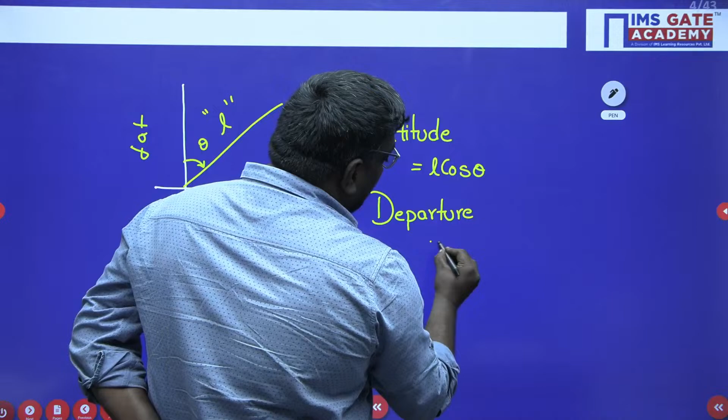Now, as part of this, whatever the northings and southings will be considered as latitudes. Again and again I am telling you the important point: the northings and southings will be considered as latitude. And in traditional methods, we take northings as positive and southings as negative.

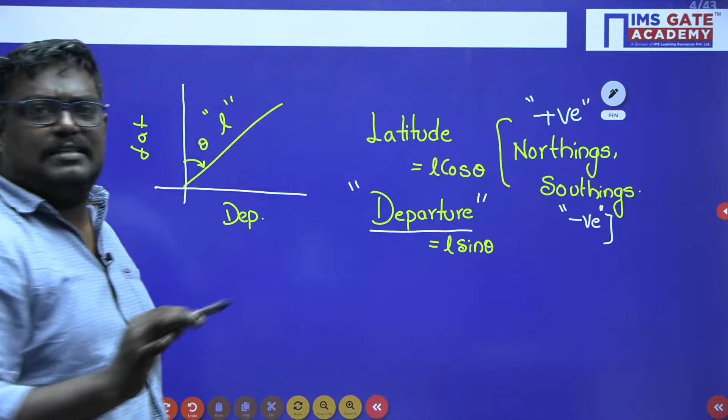Agree? And when I talk about departure, let me tell you one important thing: in departure, we take eastings as positive and westings as negative. So here we have two things: one is easting and westing, and here we have northings and southings.

So here if we consider this as a line L, we call this as... L cos theta? No, we call it L sin theta, because people are habituated to thinking horizontal line means L sin theta. Very good afternoon, Amit Goyal. Here we call it L sin theta and here we call it L cos theta, because actually this line will be taken as 90 minus theta.

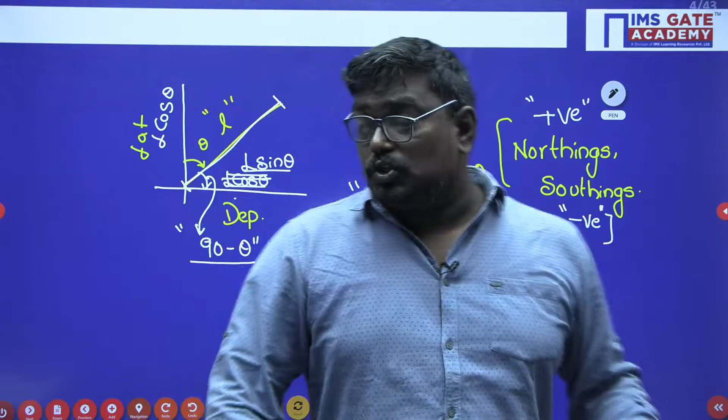So here, my dear students, when I consider latitude as L cos theta and departure as L sin theta, northing as positive, southing as negative, similarly easting as positive and westing as negative, with this actual concept we can solve this problem.

So my dear students, what do you mean by a traverse? A traverse is nothing but a group of lines connected together to form a closed loop, where using the help of a traverse you can find the area of a plot. Suppose you own a plot in Delhi, to find the area of your plot you can use the help of compass and chain surveying to know the area, which is one of the objectives of surveying.

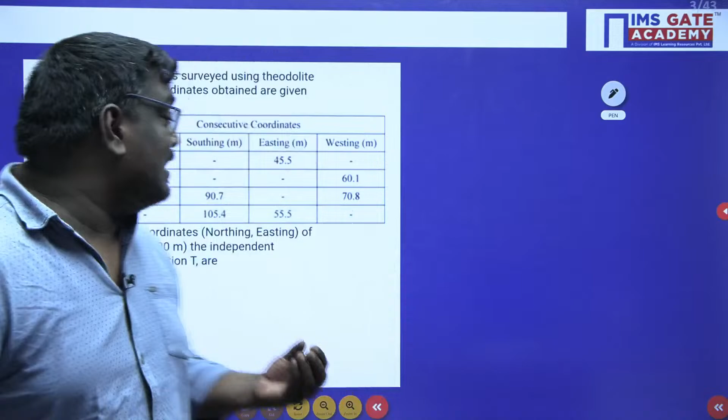So let us solve this problem, my dear students. So when I consider here, what is the summation of northings?

Here the summation of northings will be taken as 190.8. If I take the summation of south, it will be taken as 196.1.

Now consider latitude. Latitude is defined as sum of northings minus sum of southing. Sum of northing is 190.8 minus sum of southing 196.1, which gives around negative 5.3 meter.

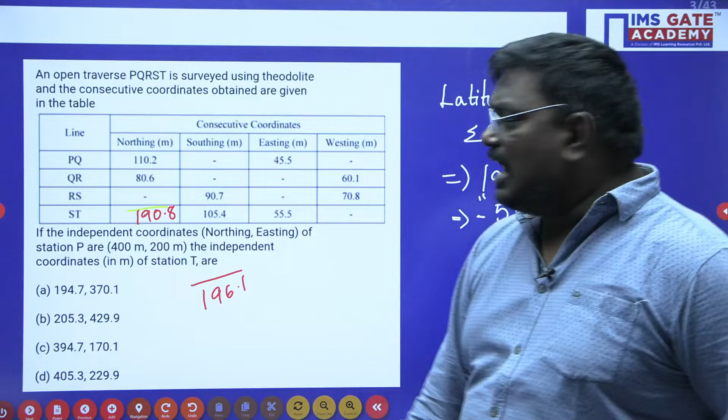Similarly, what is the sum of the eastings? Sum of the eastings is 101 and sum of westings is 130.9 meter. Now when I talk about departure...

Departure is nothing but the sum of the eastings minus sum of westing. Sum of easting is 101, sum of westing is 130.9. So we have minus 29.9 meter as departure, and sum of northings minus sum of southing is minus 5.3 meter.

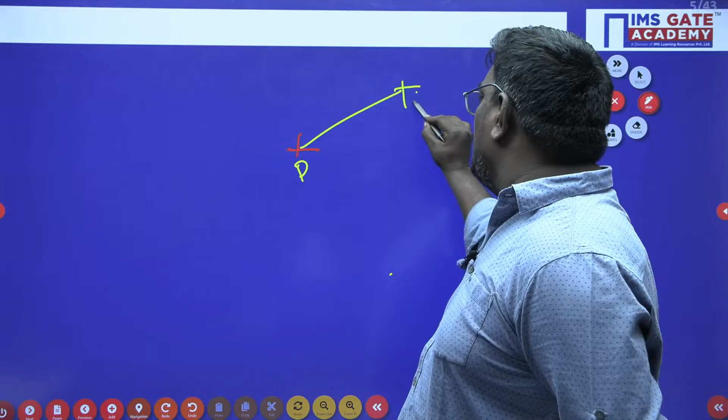Now he is asking what is the independent coordinates of T. Let me explain with a traverse. We have a point P, a traverse Q, and we have R, S, and T here. So he is asking what are the coordinates of T.

When finding the coordinates of T, we have the northing given as 400 meters for coordinates P. So 400 minus 5.3 gives 394.7 meter, which is the independent coordinate of T for northing. Similarly for easting, it is 200 minus 29.9 meter, which is equal to 170.1 meter. So these are the coordinates of point T.

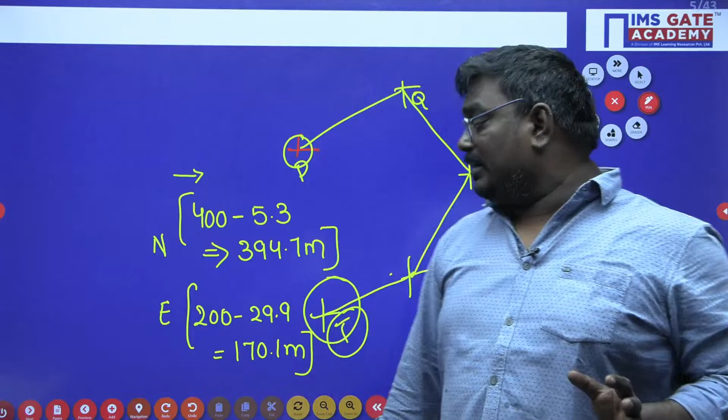These are the coordinates of coordinate T, and the word independent has a significant effect here. So the option is 394.4, 394.7, and 170.1. So option C is correct.

Let us understand the key points of this problem. A traverse is nothing but a group of traverse lines connected together. Latitudes are the northings and southings, departure is the eastings and westings. Northing is taken as positive, southing as negative, easting as positive in departure, and westing as negative.

We calculated the sum of the northings and sum of the southings, and got a value. Similarly we did for easting and westing, and the final answer is 394.7 and 170.1.

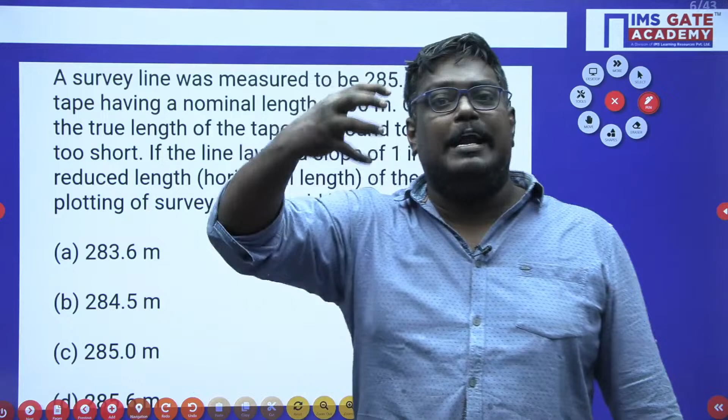So you may think this is a challenging question. A challenging question cannot be one that is not part of the GATE exam. It is a question where we identify the importance of the question and the possibility of it appearing in the GATE exam. I hope you enjoyed that question.

Let us move to the next question. A survey line was measured to be 285.5 meters with a tape having a nominal length of 30 meters. On checking, the true length of the tape was found to be 0.05 meters short, and the slope is 1 in 10. Find the reduced length of the plot of the survey work.

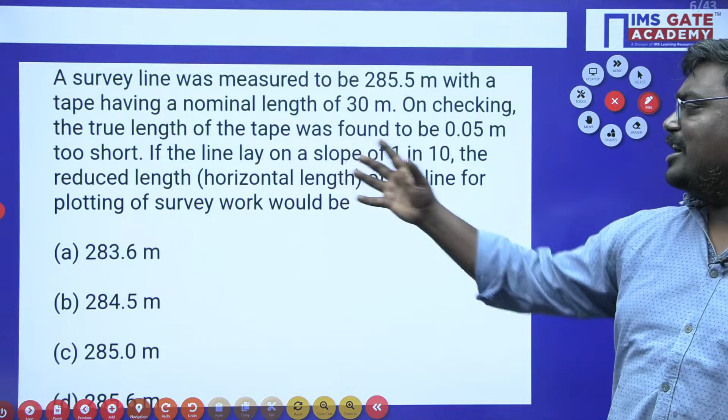How has the surveying been started? To measure a distance between two lines, we use either a chain or a tape. To measure horizontal distance, we use a chain or a tape, and to measure bearings, we use a compass. Let us understand this question.

There was a chain of length 30 meters, which is very important. This 30-meter chain has been reduced to 29.95 meter, because the chain is short by 0.05 meter. Remember, the chain is short by 0.05 meter, so you are aware that the chain is short.

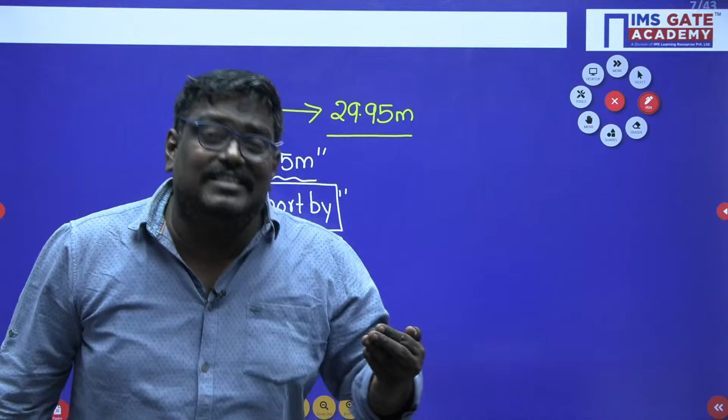When measuring a distance between A and B, if the chain is short, the measured distance will be more. So error will be positive and correction will be negative. So here, what is the actual length between the two stations A and B given in the problem?

285.5 into actual length of the chain is 29.95 upon 30. Sir, this is nothing but the correction for standardization. So on solving this, you will get a value of 285.024 meter. Agree, my dear students? Very good. Students, please try to respond in the chat box.

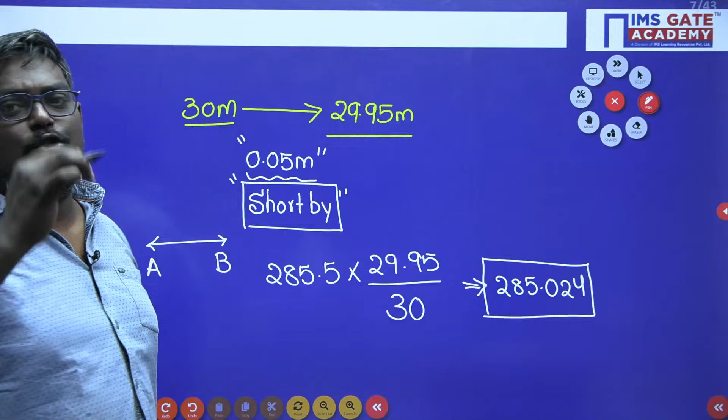So here, there are 2 points A and B. The actual length of the chain is 30 meter, but now it is short by 0.05 meter. So I applied the correction for standardization and I have got a value of 285.024.

But let me tell you one important thing. This length is laid on a slope. If this length is laid on a slope of L and if it is making an angle theta, so what is this length, my dear students? This length is nothing but L cos theta.

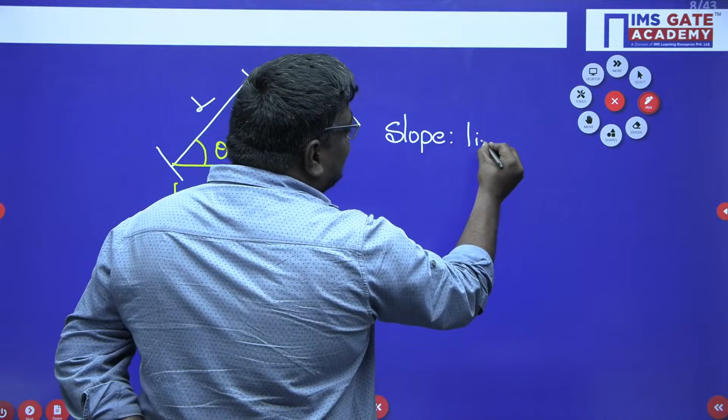So here, the slope given in the problem is 1 in 10. When I discuss slope, it means M, and M is nothing but tan theta. So when they give you tan theta as 1 in 10, what will be cos theta? Cos theta will be equal to 10 upon root over 10 square plus 1 square, that will be equal to 0.995. Agree, my dear students?

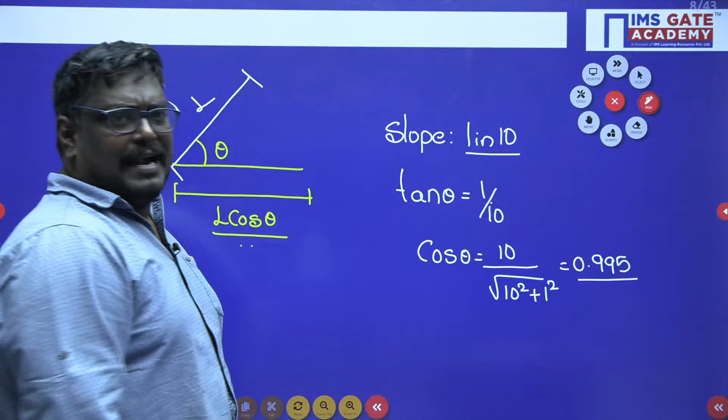Very good. So how do you find out the horizontal length? Now the length is 285.024 meter - it's one of the gate question also, students. Now corrected length will be equal to 285.024 meter multiplied by 0.995, which will give you the value 283.6 meter. So my dear students, the funda here is simple.

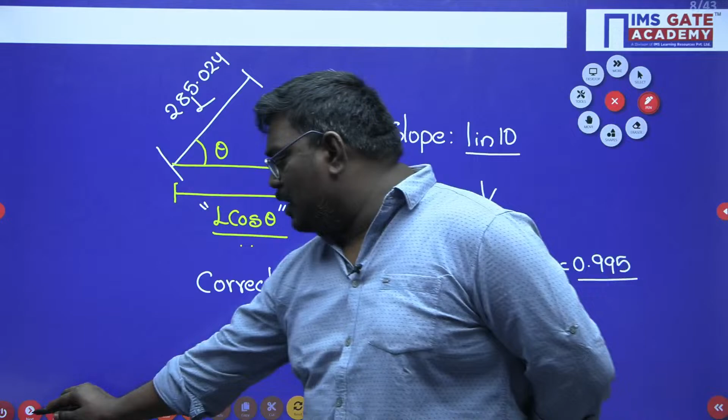How do you find out the distance? The distance is found using a chain or a tape. Correction for standardization - let me tell you, the key points in this problem are correction for standardization is given by the formula: length of the actual chain, that is, because it is short by 0.05 meters, so L actual length of the chain and correction for each chain length. So if you apply this, you will get the correction for standardization.

And also they are doing the correction for slope. Correction for slope is always negative, my dear students. It can be taken as L into 1 minus cos theta. So these two concepts will help you how to solve the problem.

Now see, students, we have another beautiful question. A square area with a side of 100 meter appears as 1 centimeter square. The photograph map shows that a contour of 650 meter passes through the area. If the focal length is 150 mm, what is the height from the aerial photograph?

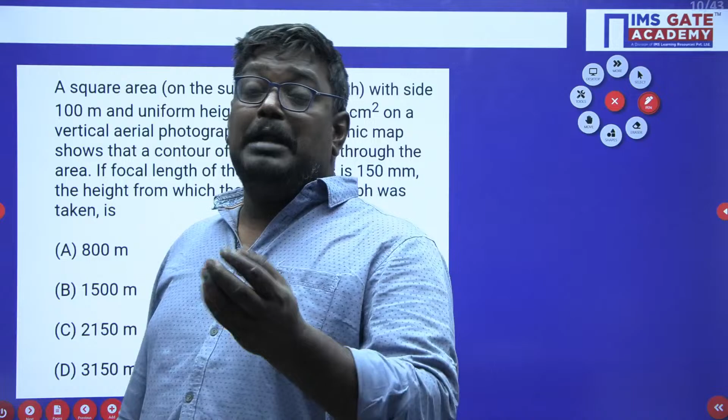Now, my dear students, let us understand what you mean by photogrammetry. Photogrammetry is the art and science of obtaining reliable information about the physical object by the process of recording - meaning you have taken a camera, you have taken my capture, you have taken my photo, so by using this photo, you will know what is my height, what is my width, these things. So that is what you do in photogrammetry.

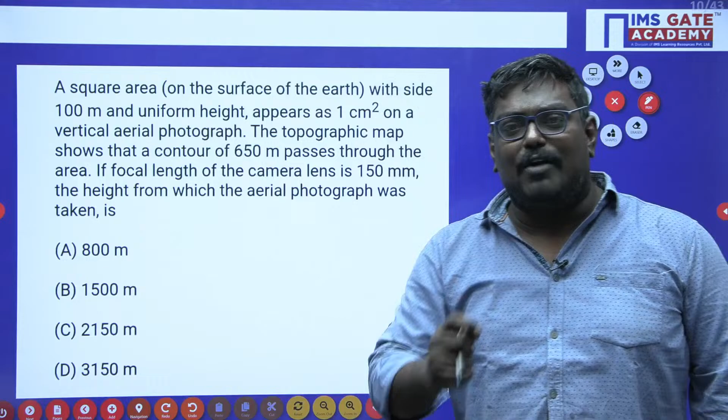Suppose, my dear students, where landslides or disasters are happening, there are some drones - that is nothing but photogrammetry. Again, for your information, photogrammetry is the art and science of obtaining reliable information about physical objects by the process of recording, measuring and interpreting the photos.

So how do you solve this? What is the agenda of a contour? A contour is nothing but an imaginary line joining points of equal elevation. So let us start this problem, students.

Now what do you mean by scale? First let me tell you the basic formula. Scale is nothing but photo distance by ground distance. It is nothing but scale of a photo is photo distance upon ground distance. So see, students, it is simple - in a ground, if you measure distance between 2 points in a ground, it can be 200 kilometers. In photo, you will show it as 2 centimeters.

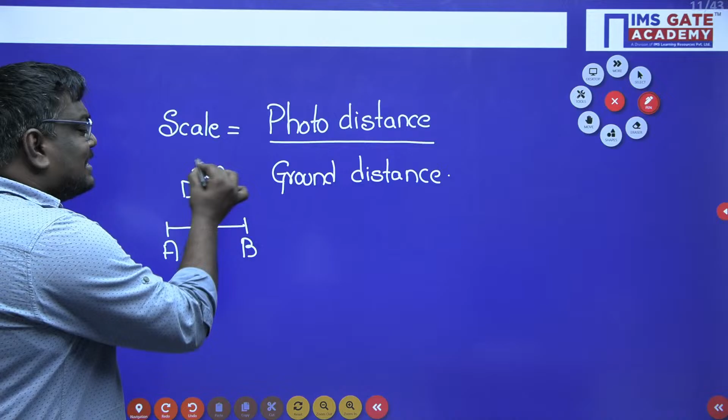So this is how you will do in scaling. If you do in a map, this is what scale of a map means - map distance by ground distance. So we have different cases here. Case 1: focal length upon flying height, if the ground surface is planar, if you are standing on top of a building and doing the value, it is focal length upon H minus h. Or if you are doing for an undulated ground, it is f upon H minus h average. So my dear students, we have 3 different things here.

Agree or not? So please write down these, students. Please write down that, students.

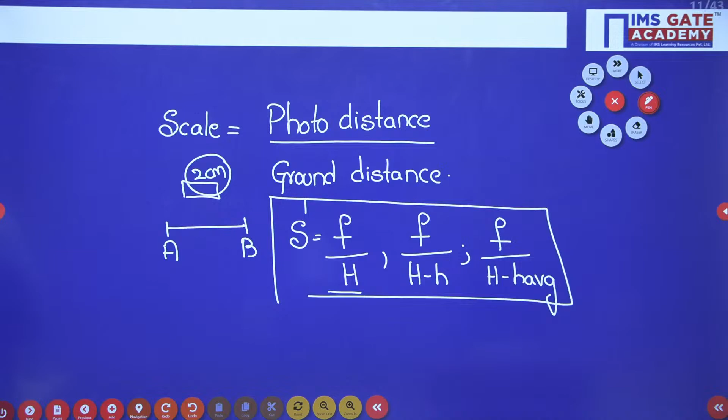Very good, very good. So here, students, you have to know what is a scale. 1 centimeter appears as 100 meter. Sir, see, 1 centimeter appears as 100 meter.

Now, 1 centimeter square appears as how many meter square? So it will be 100 into 100, which will be equal to 10 power 4 meter square.

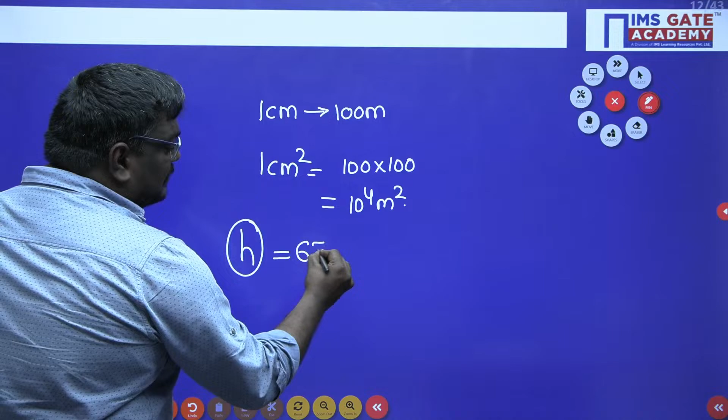Now, students, he has told in the problem that the contour is passing through a height. So the height of an object or building, small h, is nothing but 650 meter. Now what is the focal length given in the problem? Focal length was given as 150 mm, which you can convert into 0.15 meter.

Now, students, here we have the formula: scale is equal to f upon H minus h. Using this formula, you can solve this problem.

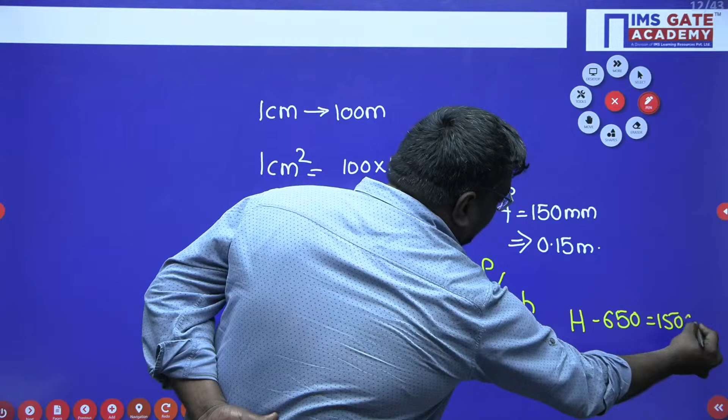So what is scale, sir? Scale is nothing but 1 upon 10 power 4, is equal to 0.15 focal length upon, the flying height we have to find out, minus small h, 650. So you can write H minus 650 is equal to 1500 meter, and H, the flying height, is nothing but 2150 meter.

So students, you should be aware of the concept: what is scale of a photo? It is defined as the ratio of photo distance upon ground distance. Are you able to understand, students?

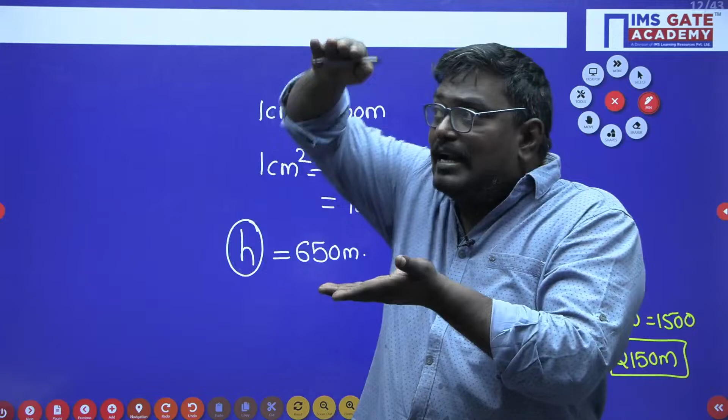So here what I have done is, we have 3 cases. If it is on the ground, it is nothing but focal length by flying height, H. If you are standing on top of a building or tower, then scale is equal to f upon H minus h. If the ground is undulated, scale is f upon H minus h average.

So the final answer here is C, 2150 meter. I hope you have enjoyed this problem.

So my dear students, there are a lot of questions asking from people. Dilip Dompalgudi: Understood, sir. Very good, Dilip, very good.

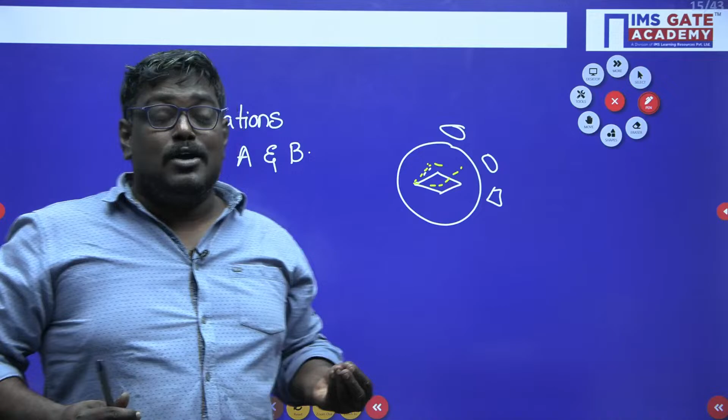So what are the conditions for local attraction? Let us understand that, my dear students.

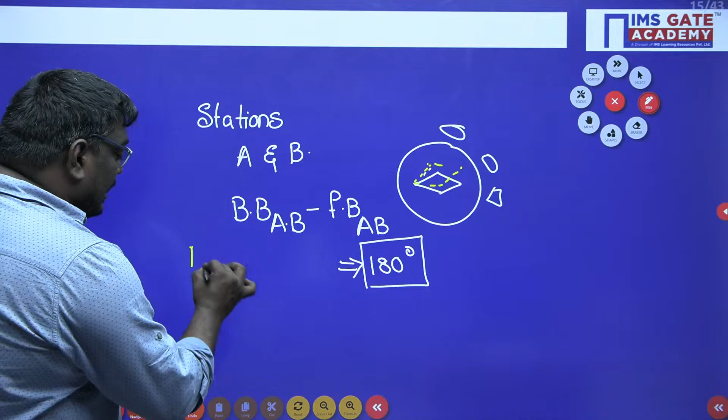If back bearing of AB minus fore bearing of AB is equal to 180 degrees, this condition is very important. If it is equal to 180 degrees, then no station is affected by local attraction.

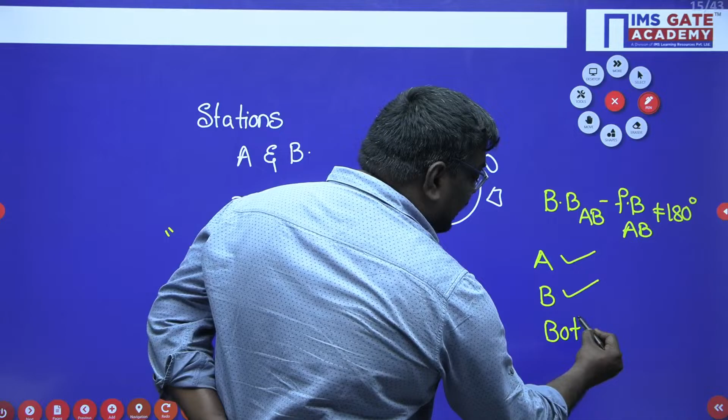If back bearing of AB minus fore bearing of AB is not equal to 180 degrees, here comes the concept. Station A can affect, station B can affect, or both stations A and B can affect. So there can be 3 cases if back bearing minus fore bearing is not equal to 180.

So here back bearing minus fore bearing is not equal to 180. Either station A can affect, station B can affect, or both stations A and B can affect. So let us solve this problem.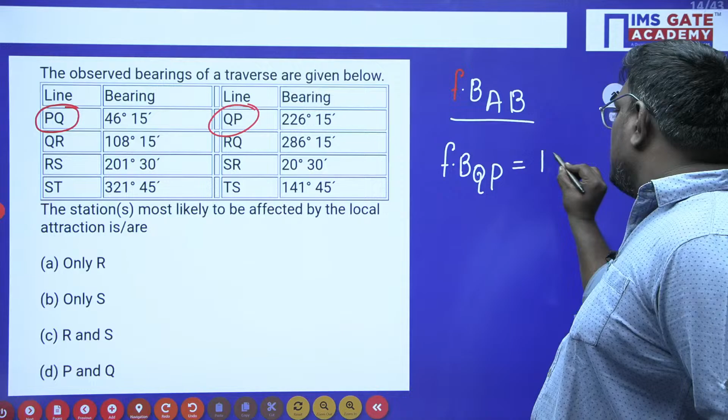Now you should be smart because you are preparing for GATE. So what is PQ here and what is QP? Remember, fore bearing of line AB... suppose here he is telling fore bearing of QP, you can write here fore bearing of AB, but I am telling you fore bearing of line QP can be written as back bearing of PQ. Both will be same.

What have I done? Tell me. Here we have QP, here we have PQ, just I have interchanged the names.

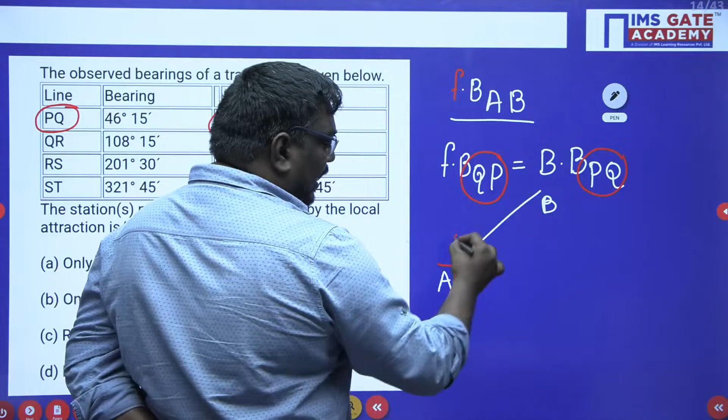Suppose if I have a station AB, if I write here, what is this? You can write fore bearing of BA. This can also be written as back bearing of AB. So fore bearing of BA will be equal to back bearing of AB. What happened? Stations interchanged. So remember, fore bearing and back bearing will be equal if the stations are interchanged.

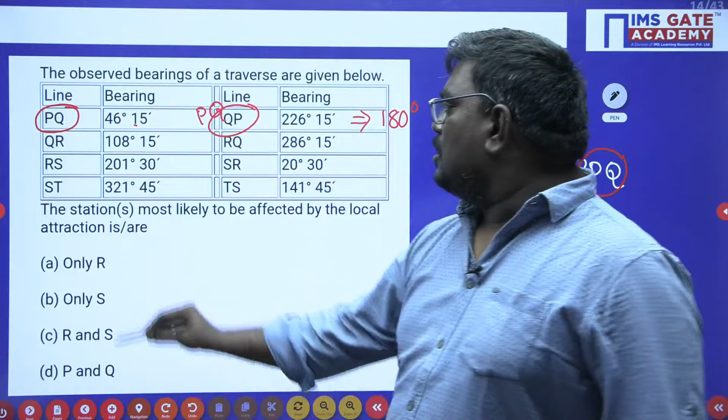So here if I take 2 stations, PQ and QP, this is nothing but fore bearing of QP, which can be written as back bearing of PQ. So the difference between them is equal to 180 degrees. Now here the difference is not equal to 180 degrees, and here also not equal to 180 degrees. But if you see here, S and T, this is equal to 180 degrees.

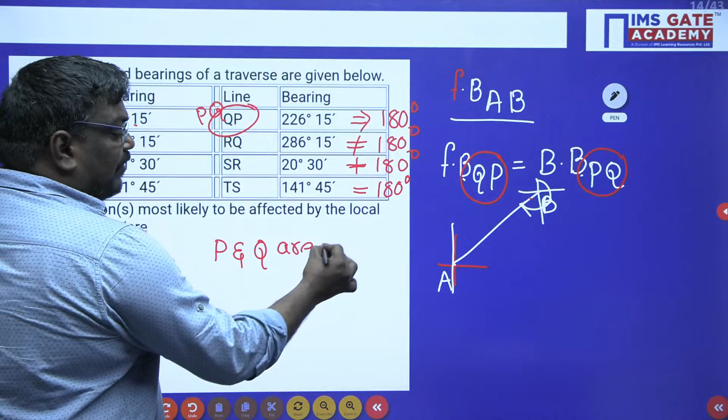Now stations P and Q are not affected. No station is affected means P and Q are not affected. Similarly, when I talk about S and T, they are also not affected. So we have 5 stations, P, Q, R, S and T. P and Q are not affected, S and T are not affected. What is the station which is affected? Only R. So the answer here is only R.

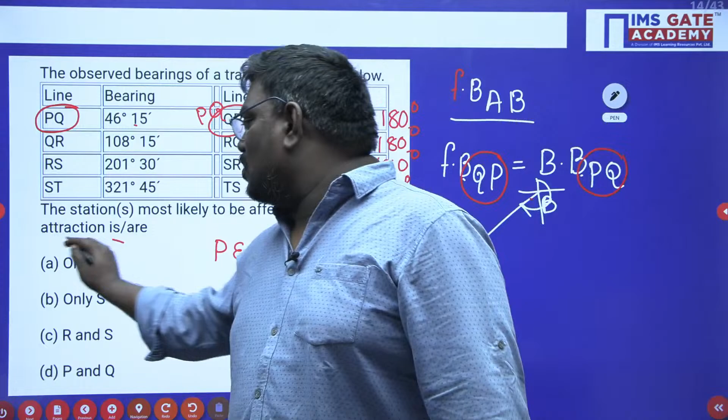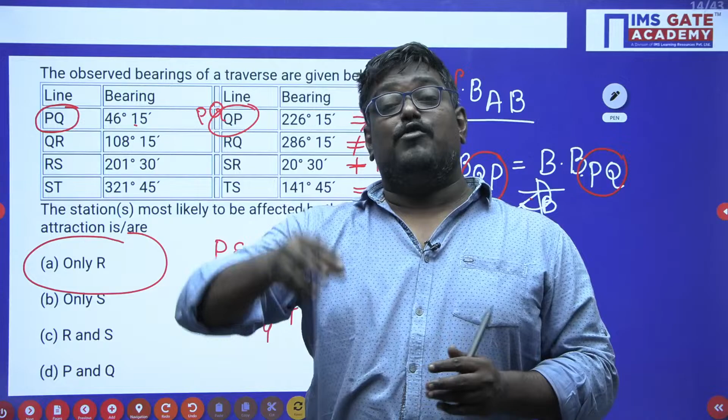So let me conclude the gist of this problem. If there are 2 stations, and back bearing of AB minus fore bearing of AB is equal to 180, no station is affected by local attraction. If back bearing minus fore bearing is not equal to 180, either station A can affect, station B can affect, or both stations A and B can affect. From this concept, you should know which stations are affected. Another important concept: back bearing of PQ can be written as fore bearing of QP, just by interchanging the stations.

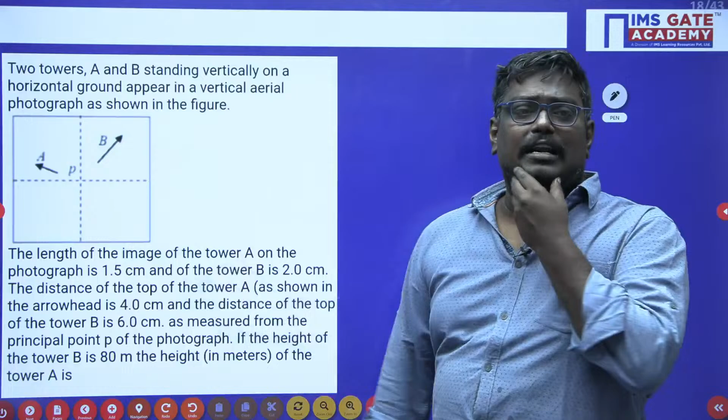Now we have another question, this is called relief displacement. First let me tell you what do you mean by relief displacement. Relief displacement is nothing but the radial shift of the image. Using relief displacement, you can find out the height of a tower, height of an object - these are the applications.

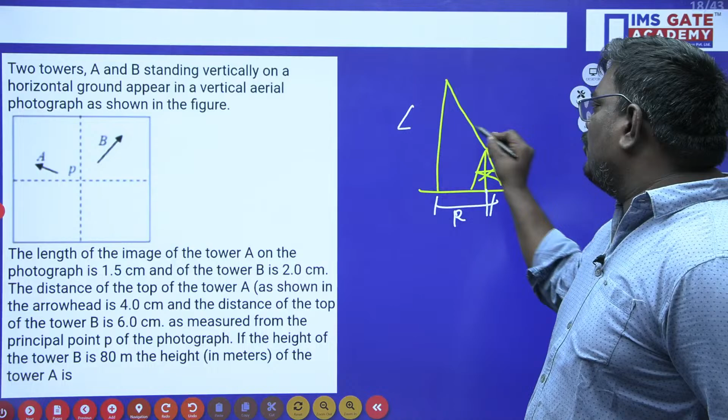Now students, this difference between the top and bottom of the image, that is nothing but relief displacement. If there is no relief displacement, if the tower is here, both top and bottom of the image will coincide. Are you getting me?

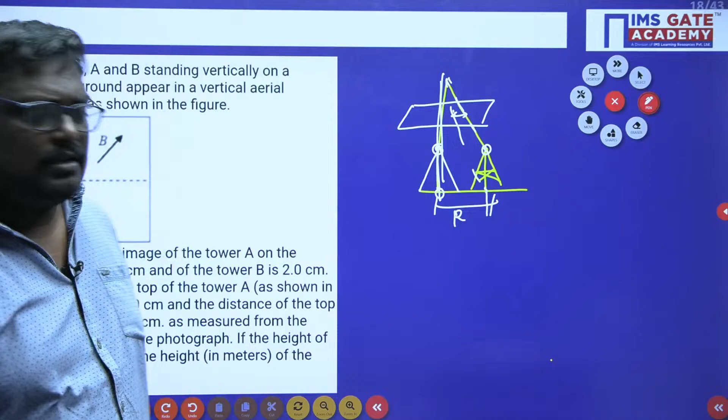Relief displacement is given by the formula: Delta R is equal to R1H upon capital H.

What is delta R here? Delta R is nothing but the relief displacement.

Now what is R1? R1 is the radial distance to the top of the image.

Capital H is the flying height. Small h is the height of a building or height of an object. So my dear students, if you have some formula, please understand the parameters: Delta R is the relief displacement, R1 is the radial distance to the top of image, capital H is the flying height, small h is the height of the object.

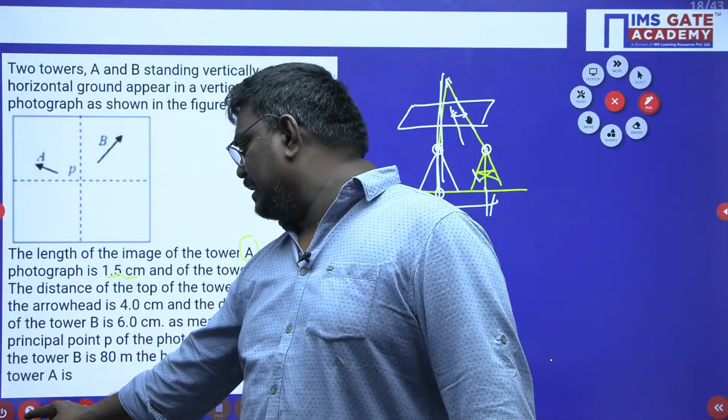Now see students, the length of the image of the tower A is 1.5 centimeter and B is 2 centimeter, both relief displacements. And tower A is 4 and B is 6 centimeter radial distance. If the height of the tower B is 80 meter, what is the height of the tower A? Now let us understand this diagram.

We have two towers here. One is A, another one is B.

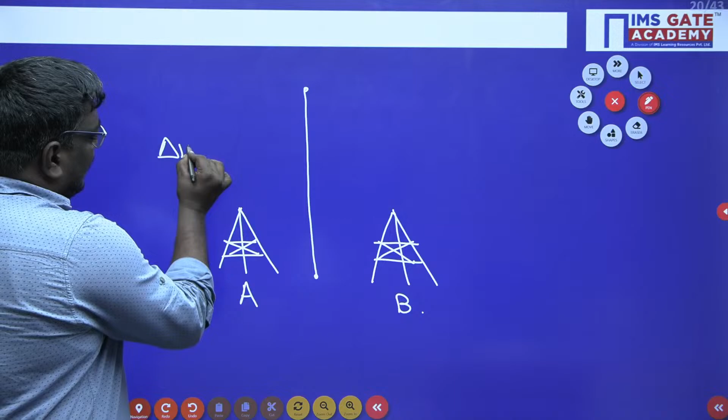Now see students, if A and B are given like this, the relief displacement of A, delta RA, is 1.5 centimeter, and delta RB is 2 centimeter, as given in the problem. Radial distance to the top, R1A, is 4 centimeter. R1B is 6 centimeter. Here he is asking what is the height of tower A, and height of tower B is given as 80 meter.

Now my dear students, in the second case we have the relief displacement, radial distance and height of the tower. How do you find out the flying height using this concept?

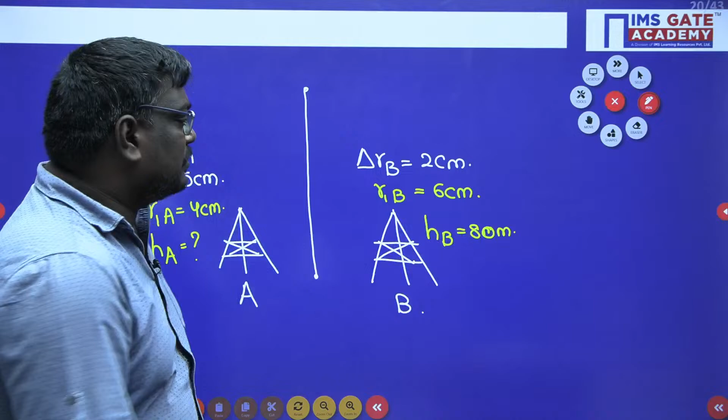You know delta RB can be written as R1B into height of the tower upon flying height. Remember, flying height is the same in both cases. So delta RB is 2 centimeter, R1B is 6 centimeter, height of the tower is 80 meter upon flying height. From this it is evident that flying height is equal to 240 meter. Now how do you solve the height of object A?

Here you can simply write delta RA is equal to R1A into height of the tower A upon flying height. Delta RA is 1.5, R1A is 4 centimeter, height of tower A is unknown, and flying height is 240. So from this you can write height of the tower A is equal to 90 meter.

Because I have calculated 240 from this and applied all the formulas, plugging in all the values, we got the height of the tower A as 90 meter.

So what are the key points in this problem? Relief displacement is nothing but the lateral shift of the image of a tower. Using relief displacement, the height of an object or tower can be known. Relief displacement is given by the formula delta R equal to R1 into H upon capital H, where delta R indicates the relief displacement, and R1, remember this with common sense, is the radial distance to the top. But let me tell you, this problem can also be solved using the similar triangle concept.

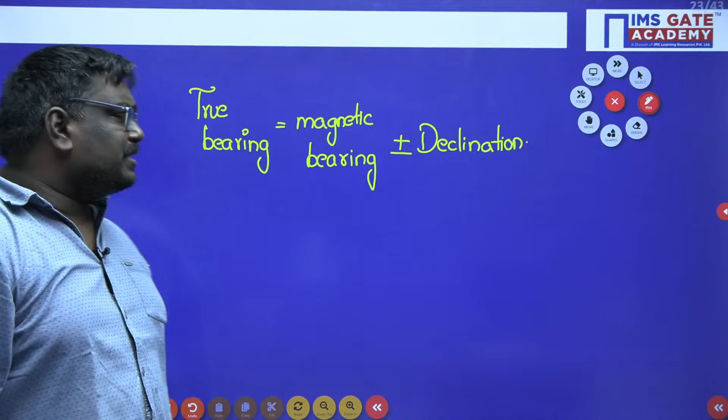My dear students, positive sign will be used if the declination is eastwards. Negative sign is used if the declination is westwards. I hope you are clear.

Now, they have given you one thing, sir. We have two station readings, OA and AO. Now, my dear students, let us understand one point. He has told in the problem that station A is affected by local attraction.

Sir, it has a meaning. Station A is affected by local attraction means the readings taken from A are absolutely wrong. If station O is free from local attraction, the readings taken from O are absolutely correct. Are you able to understand, my dear students? If there is no local attraction, station readings are correct. If there is a local attraction, the readings are wrong.

So let us go through this. One is AO, which is south 52 degree 40 minutes. And what is OA? OA is north 50 degrees 20 minutes west. But remember, this reading is correct.

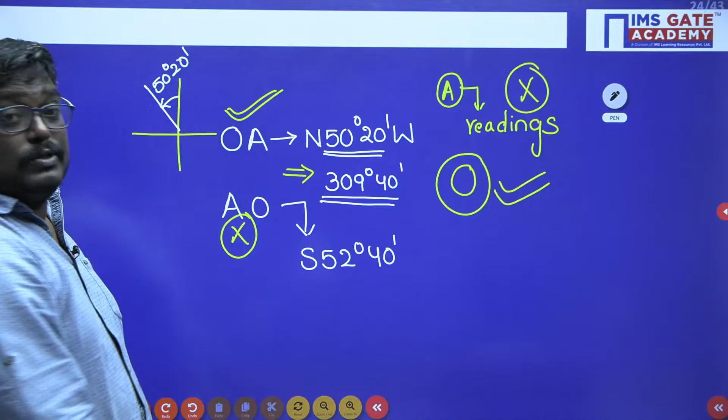So let me tell you, OA is correct. So fore bearing of OA is equal to 309 degree 40 minutes. Now what will be back bearing of OA? Back bearing of OA will be equal to 309 degree 40 minutes minus 180 degrees, which is equal to 129 degrees 40 minutes, which should be the true value.

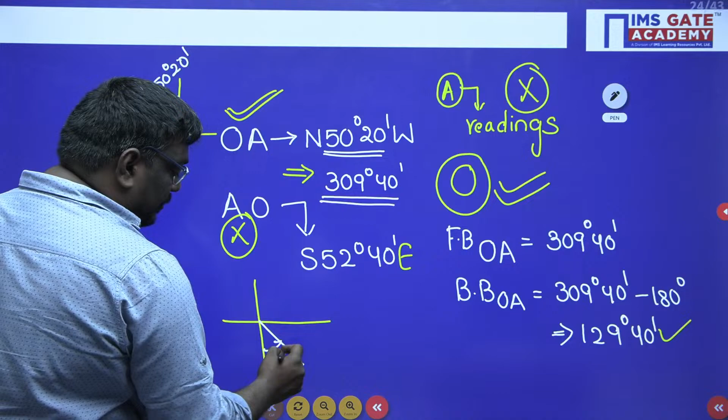But actually what is given in the problem? South 52 degree 40 minutes east. What is this angle? This angle will be equal to 127 degree 20 minutes. If I convert this into whole circle bearing.

Now see students, actually it should be how much? 129 degree 40 minutes. But actually given in the problem, 127 degree 20 minutes. To make this the true value, whether you have to add or subtract? You have to add. Are you getting me, sir? The correct value of back bearing of OA is 129 degrees 40 minutes.

And for your information, back bearing of OA will be equal to the fore bearing of AO, which I told you in the previous concept. So here they have given 127 degree 20 minutes. It should be 129 degree 40 minutes. To make it 129 degree 40 minutes, we have to add a value of 2 degree 20 minutes.

You have to add a value of 2 degree 20 minutes. So the correction for local attraction, correction due to local attraction, is 2 degree 20 minutes. Agree? Now see.

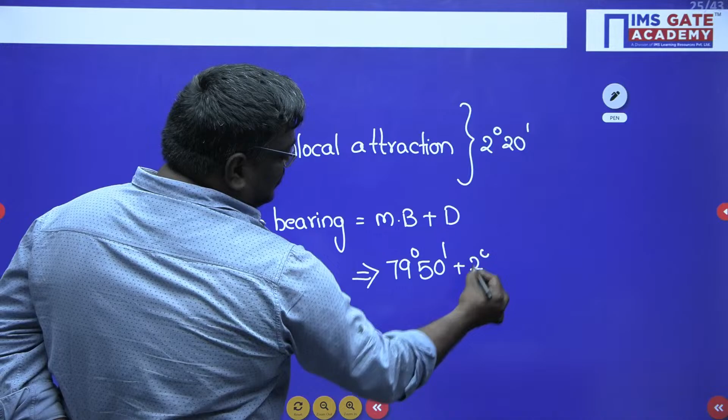And declination is given as east, so it is 2 degrees plus only. You can ask me why I have taken plus 2 degrees, because the declination is towards eastward. So you can write it as 81 degrees 50 minutes. That is the true bearing of line AB when declination is positive 2 degrees.

Now here we have local attraction of how much, sir? 2 degrees 20 minutes. So here we have to do this correction also: 81 degrees 50 minutes plus 2 degrees 20 minutes, which will be equal to 84 degrees 10 minutes. So the final answer here is 84 degrees 10 minutes. I hope you are clear.

So my dear students, there are two important things in this problem. True bearing is equal to magnetic bearing plus or minus declination. If the declination is eastwards, you have to take it as positive. If the declination is westwards, you have to take it as negative.

So if they have given that at some station X, Y or Z there is no local attraction, the readings taken from that point or station will be true. If there is local attraction, the readings taken from that station are not correct. So if you follow this small methodology, you can solve any problem on this.

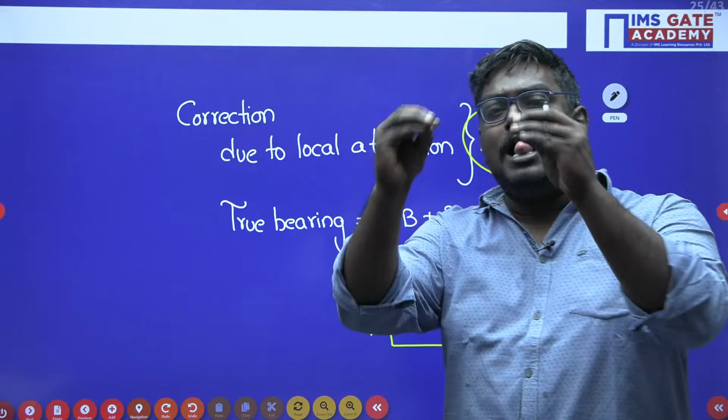And let me tell you one suggestion. Whenever you are solving problems on true bearing, magnetic bearing and declination, it's my sincere advice to convert the bearings into whole circle bearing. Don't try to do the problem with reduced bearing, because all the first confusion can be avoided if you solve the problem using whole circle bearing. I hope you are clear what I am trying to say.

If you are following reduced bearing, you have to be aware of the diagram. Okay, my dear students. Very good, very good.

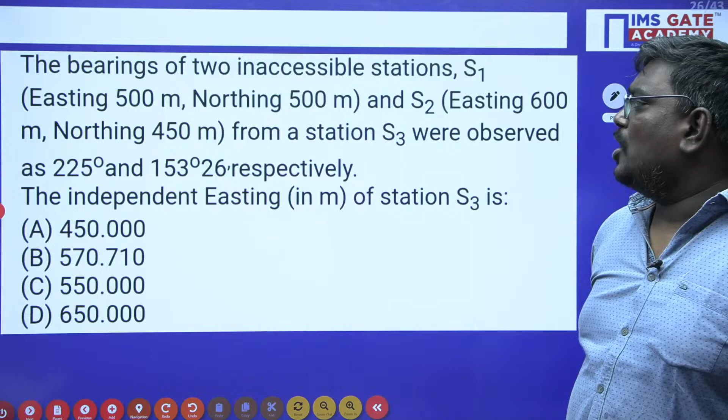Sir, this is another important question. Here there are two questions. The bearing of two inaccessible stations: S1 with easting 500 and northing 500, and station S2 with northing 450 and easting 600, from a station S3 with the bearings of 225 degrees and 153 degrees 26 minutes. What is the independent easting of station S3?

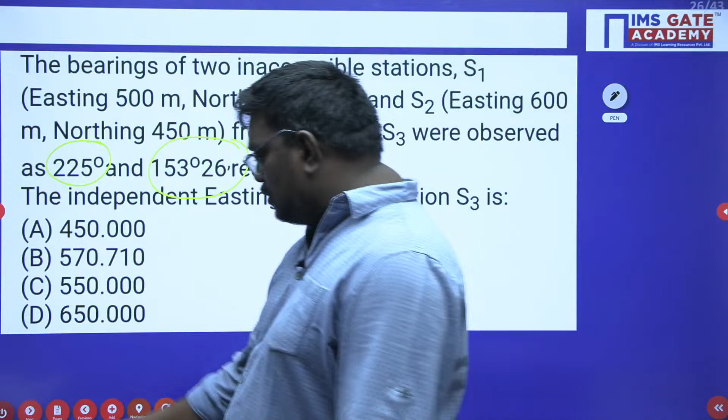Now see, sir, we have a station S3. From here there was a station S1, making an angle of 225 degrees, which is given in the problem. There is another station S2, which is making an angle of how much, sir? 153 degrees 26 minutes. This is making an angle of 153 degrees 26 minutes.

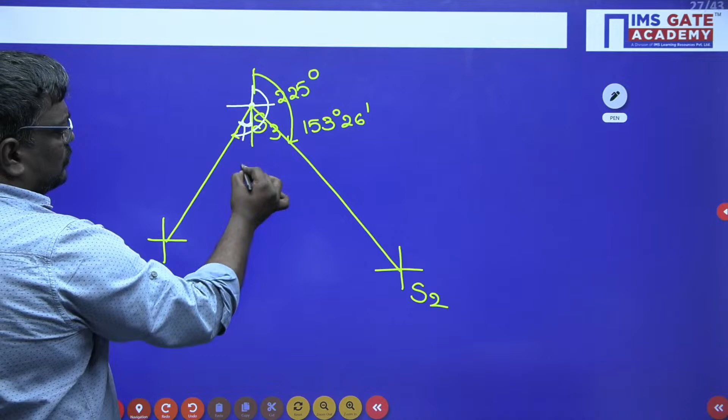So let me tell you what is this angle. This is 225, so this angle will be equal to 45 degrees. If you consider geometry, these are alternate angles, so this will also be 45 degrees. Similarly, this is 153 degrees 26 minutes, so this angle will be equal to 26 degrees 34 minutes, which is 180 minus. So this is also equal to 26 degrees 34 minutes.

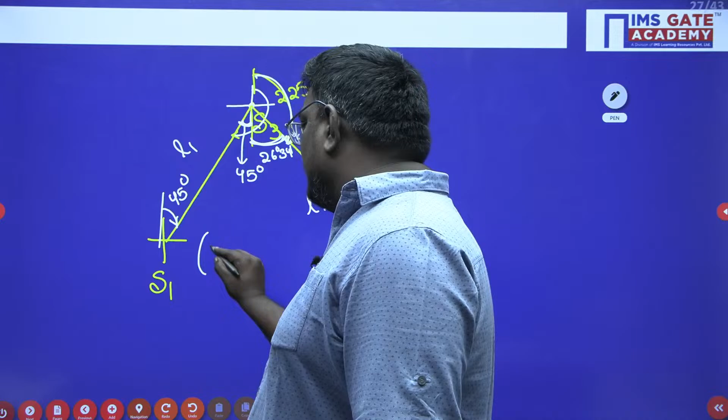I'll take this as L1, and this as L2. Now see, students, what is the northing side? 500, 500 for the first one. If I take here 500 meters north and 500 meters north, I'm just drawing the diagram. If you draw the diagram, almost 100% of the problem is done. If you solve, the other one is making an angle with northing 450 and easting 600.

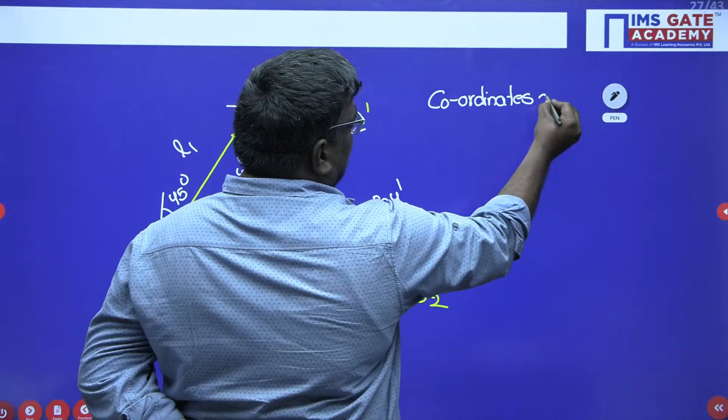How do we write the coordinates of S3 with respect to S1? Sir, in coordinate geometry, you know about transformation of axis. Suppose you have one point, origin 0,0. If this axis has been transferred to here, you will write capital X is equal to some x plus h, upon y plus k. You might have studied this in +2. Same thing I am doing here, sir.

I know the coordinates of S1 here, 500 and 500. What will be the coordinates of S3 if this length is L1? So you can write coordinates of S3. Here it is northing, so coordinates of S3 can be written as 500 plus L1.

Sir, see, this is northing with respect to S1, so cos 45 degree. Similarly, if I write about easting, it will be equal to 500 plus L1 sin 45. So these are the coordinates of S3 with respect to S1.

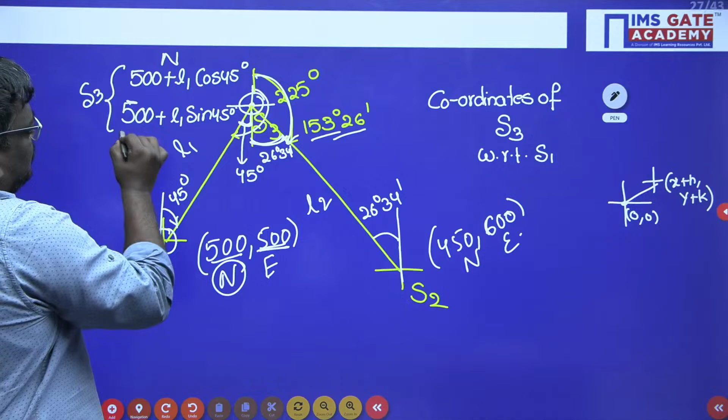Are you following, my dear students? Are you following? Very good, very good.

What will be the coordinates of S3 with respect to S2? Here, students, I will take this length as L2. Here northing is how much? 450. So you can write it as 450 plus L2 into cos 26 degree 34 minutes.

But if you see the coordinates of easting, how much will it be written as here? The other length, sir, this will be written as 600, no? Here it is 450, 600. Sir, see, here this is towards this side, so it will be positive, but here it is towards this side, so negative. So 600 minus L2 into sin 26 degree 34 minutes.

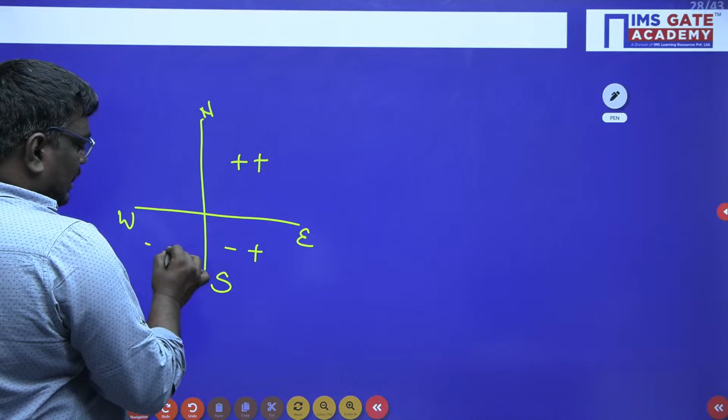Are you getting me? Let me explain one thing. Sir, see, if I take coordinate axis like this, this is north, this is south, this is east, west. Both are positive here. Here negative, positive. Here negative, negative. Here it is positive, negative.

Let me tell you what is this coordinate. Suppose if you are moving in this direction, both are positive. One is moving negative and this is negative, latitude, departure is positive. So if you are moving in this direction, both are negative. If you are moving in this direction, this is positive. So here, see, I have taken this direction in this way. That is the reason I have taken negative here.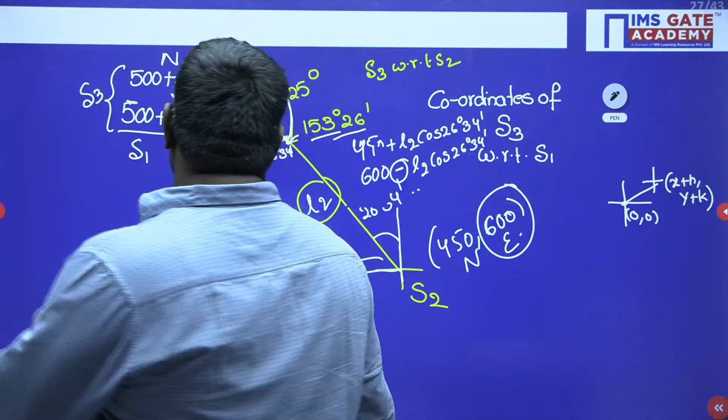Now he is asking in the problem, what is the independent coordinates of easting? So when I talk about independent coordinates of easting, here is the second one.

Sir, see, coordinates of S3 will be equal to 500 plus L1 sine 45 degrees.

Now see students, here what will be L1? I will tell you, 500 plus L1 will be, if you calculate that, 50 root 2 into 1 by root 2, this will be equal to 550 meter.

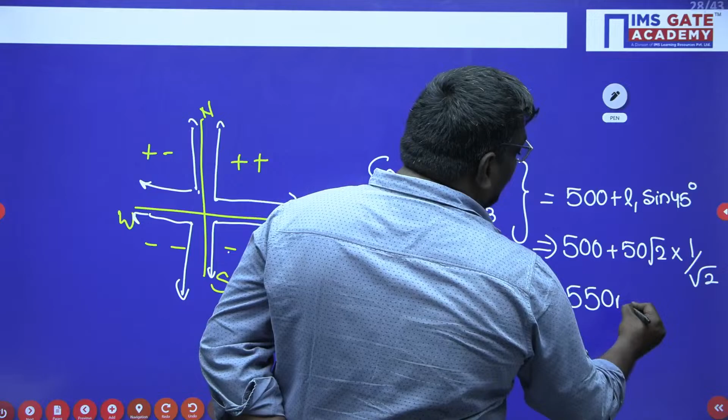Sir, how I know L1 is 50 root 2, you have to equate this equation equal to this equation and this coordinate equal to this coordinate. Based on this, you will get L1, L2 values, and substituting in that, you will get a value of 550 meters. Okay, sir? I hope you are clear.

Now see students, there was another question here. The chainage of the intersection point of two straights is 1585.60 meter and the angle of intersection is 140 degrees. If the radius of circular curve is 600 meter, find the tangent distance and the length of the curve.

My dear students, here why I have given this question? Because of what people have done wrong in the previous cases. Sir, see, suppose if I have taken this as a curve, sir, simple curve, circular curve. Okay.

Sir, he has given in the problem this angle of intersection as 140 degrees. They have not given this angle, sir. Actually, when I take according to geometry, delta, this delta and this delta will be equal. If students have taken delta as 140, then the problem is wrong. You have to take delta equal to 180 degrees minus 140 degrees, which is equal to 40 degrees.

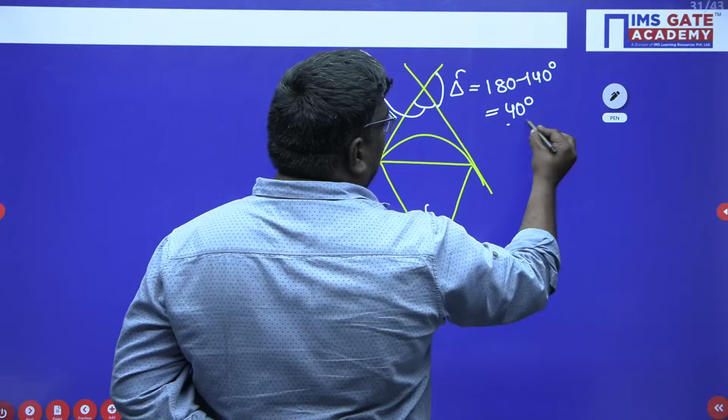Okay, here in the problem, radius is given as 600 meter. But let me tell you, how do you find out the length of tangent? Sir, length of the tangent is given by the formula R tan delta by 2. Agree? When I talk about R tan delta by 2, here what is the radius, sir?

Radius is 600 meter into tan 40 degrees by 2. This will be the length of the tangent. Okay, what is the value? Can anyone tell me? This is length of tangent.

If I talk about length of curve, it is nothing but pi R delta by 180 degrees. What is pi here? Radius is 600 meter, delta is 40 degrees upon 180 degrees, so this will be 4.5. Can anyone tell me what is this answer, sir? What is the length of the curve and length of tangent?

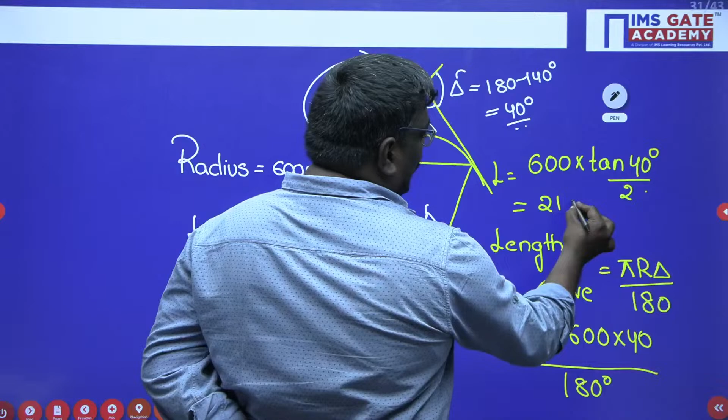Sir, see, length of the tangent will be equal to 218.84 meter and length of the curve will be equal to 418.87 meter. This will be equal to 218.84 meter. Okay? Janani, please check it.

It will be 600 into tan 20 degrees. 600 into tan 20. Or if you want me to do it, let me do it. 600 into tan 20 degrees.

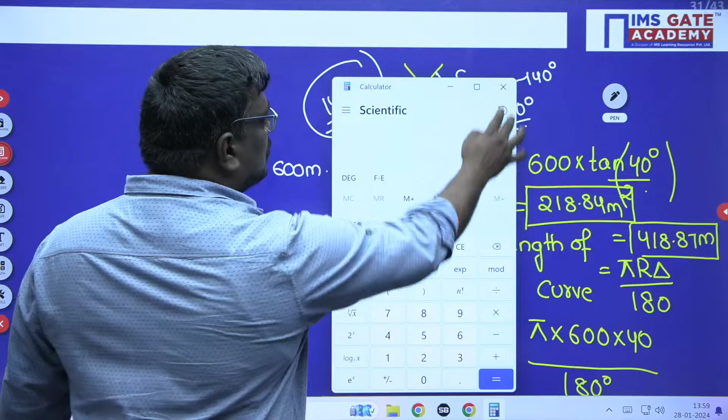600 multiplied by tan 20. How much value you got, sir? Sir, you will get 218.84 meter. Very good, Janani. Very good.

So, see students, I hope you have enjoyed this session. Students, if you are looking for, sir, repeat Gautam. Which one, sir? Gautam, which one you want me to repeat? Yes, Dilip. Yes, very good. Sir, let me tell you. Sir, here, I think Gautam wants me to repeat this question.

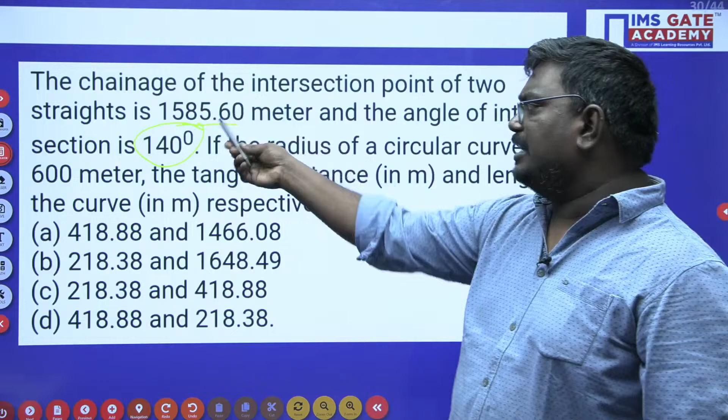Okay. Sir, the chainage of the intersection point of two straights is given, and the angle of intersection is 140 degrees. Okay, let me tell you in this question. Gautam, see, there is a curve here, a simple curve, and we have two tangents here.

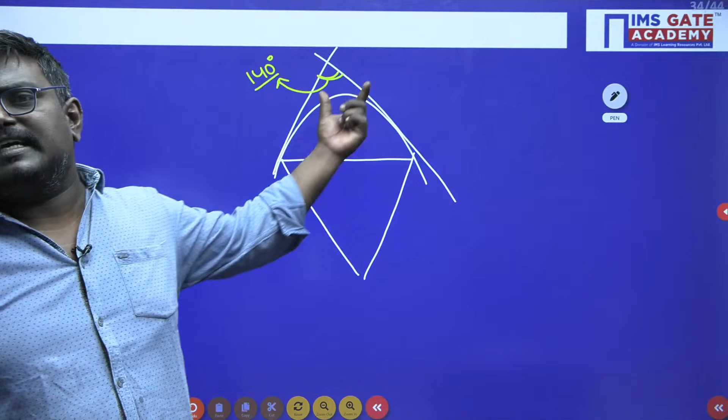Okay. Here, what I would like to tell you is this angle they have given, Amma. This angle is 140 degrees, the angle of intersection between the tangents. Now, what will be this angle, sir? If I consider this is 180 degrees, this will be equal to 180 minus 140, so this will be equal to 40 degrees.

Now, according to the geometry, if this angle is equal to delta, this angle will be also equal to delta. Now, what is the length of the curve? If this is a curve having a delta and radius r, we write the length of the curve as r into delta, which if you convert into radians, it will be pi r delta by 180 degrees.

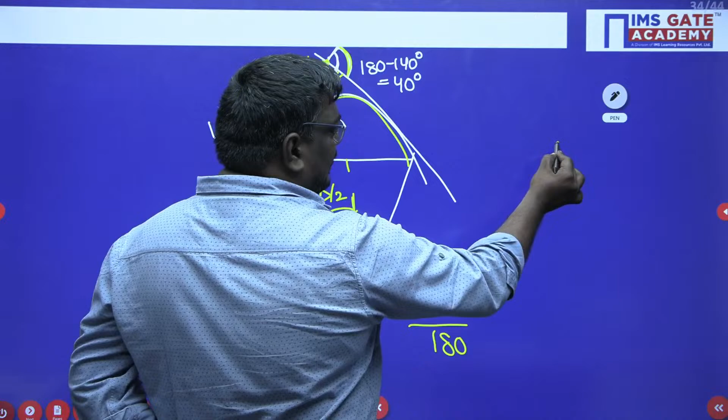Now, see students, if you consider this as V1 and this as T1, this VT1 we call it as length of the tangent. And if I consider this triangle VT1O, with O as center, this angle will be delta by 2 and this will be radius. If I take this as a right angle triangle here, this is V, this is T1, and this is O. This is radius R and here we call it delta by 2. So, this length can be written from geometry as r tan delta by 2.

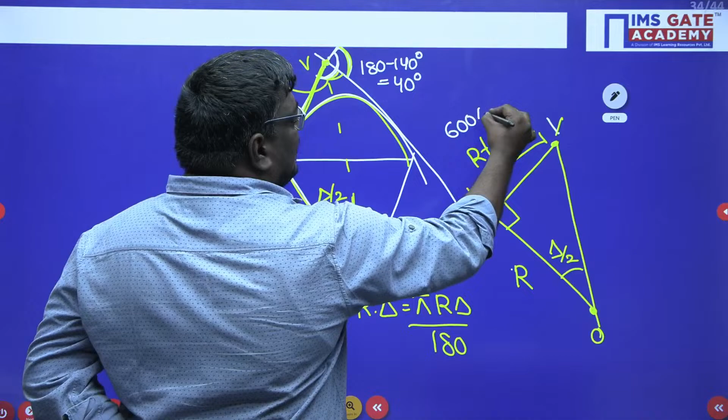So here you know, Gautam, yeah, very good, Gautam, very good. So here, what is r, the radius? 600 into tan delta by 2, which is tan 40 degrees by 2. And length of the curve is pi into 600 into 40 by 180 degrees.

Now, are you clear, Gautam? Can you please respond? Gautam and Dilip, are you clear with this problem? Is it clear for everyone, both of you? Can you please respond?